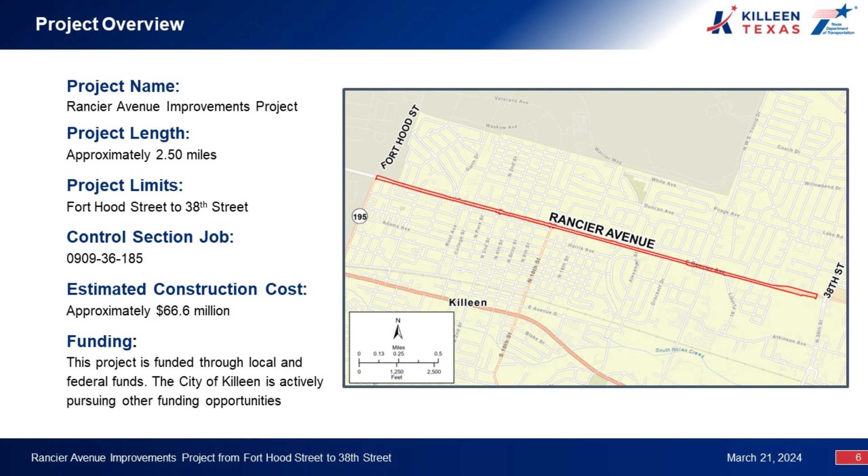The estimated cost of the proposed project is approximately $66.6 million, which would be funded with a combination of federal and local funds. The City of Killeen is actively pursuing additional funding opportunities.

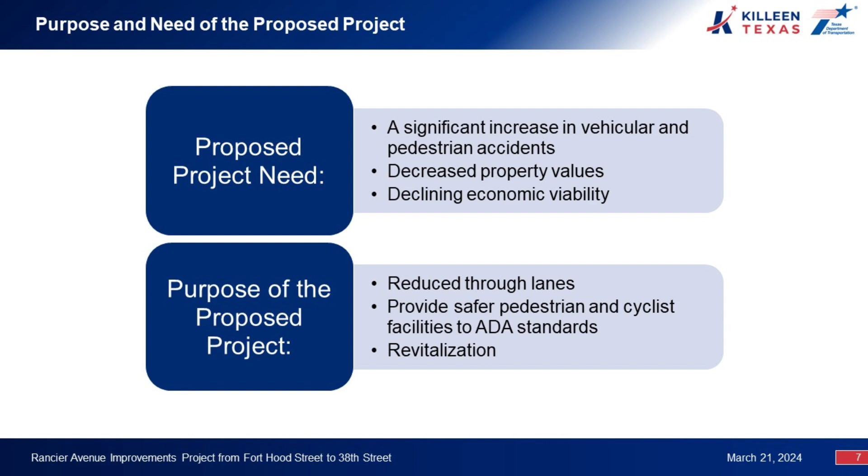The proposed Rancier Avenue Improvements Project is needed because in the past 50 years, Rancier Avenue has seen a significant increase in vehicular and pedestrian accidents, a decrease in property values along the roadway, and a decline in economic viability in the area. The overall purpose of the project is to reduce through lanes, provide safer and more accessible facilities for pedestrian and cyclists meeting ADA standards, and increase the economic value of the area.

In this part of the presentation, we will introduce the proposed improvements so that you can become familiar with what actions are being considered and provide informed feedback. Rancier Avenue can be separated into distinct zones. These zones are simply based on the context of the existing uses and are subject to changes. This slide illustrates the limits of each zone.

The post-transition zone covers the limits east of Fort Hood Street to west of Root Avenue for approximately 0.57 miles. The urban zone covers the limits east of Root Avenue to west of 14th Street for approximately 0.47 miles. The city transition zone begins east of 14th Street to west of W.S. Young Drive for approximately 0.83 miles. The Greenway zone begins east of W.S.

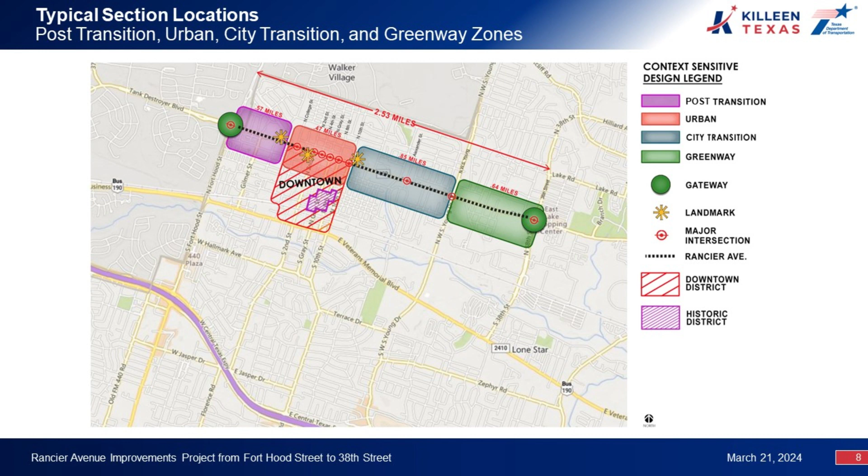Young Drive to west of 38th Street for approximately 0.64 miles. Let's take each zone one at a time. The different configurations of these zones are illustrated using typical sections, which are cross-sections of how the roadway looks today or would look with the proposed improvements.

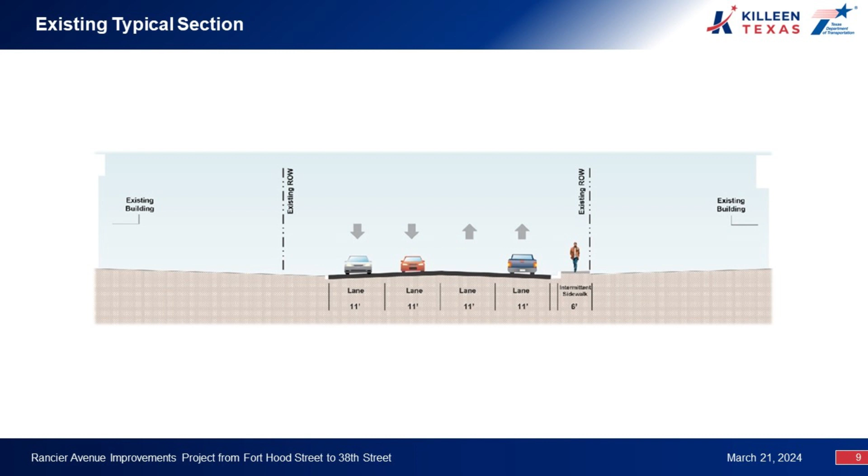Today, Rancier Avenue has four 11-foot wide lanes, two in each direction, and discontinuous sidewalks. The proposed post-transition zone shown here would have two 11-foot wide travel lanes, one in each direction, with an 11-foot wide turn lane or raised median with landscaping, two 5.5-foot wide bike lanes, one in each direction, and 8-foot wide parallel parking lanes, 6.5-foot wide landscaping buffers, and sidewalks varying in width from 8 to 10 feet wide on each

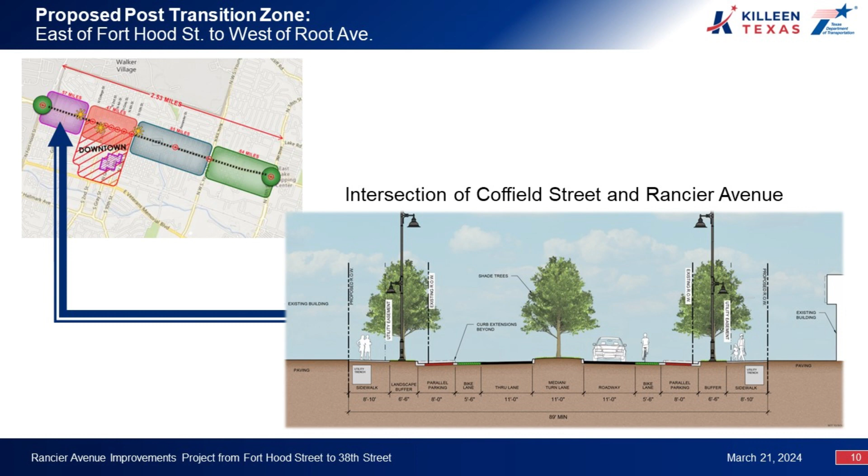side of Rancier Avenue. The proposed urban zone would have two 11-foot wide travel lanes, one in each direction, with an 11-foot wide raised median with landscaping, two 5.5-foot wide bike lanes, one in each direction, and 14.5-foot wide landscaping buffers, and sidewalks varying in width from 8 to 10 feet wide on each side of Rancier Avenue.

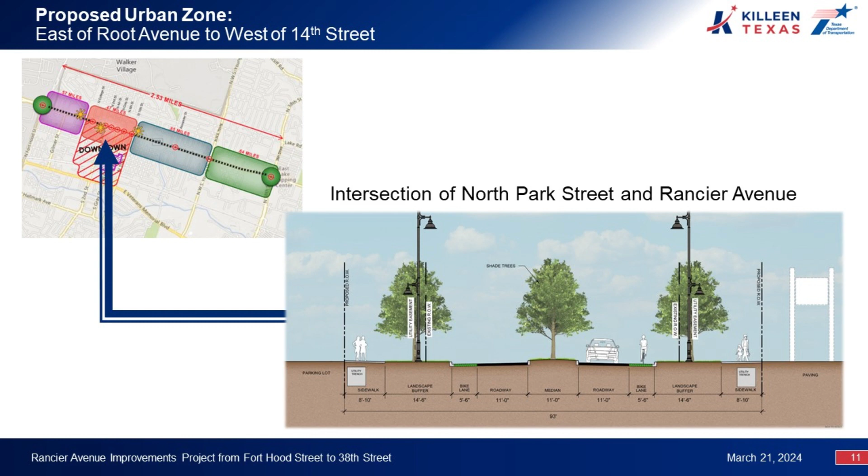The proposed city transition zone shown here would have two 11-foot wide travel lanes, one in each direction, with a 14-foot wide turn lane, two 5.5-foot wide bike lanes, one in each direction, and 6.5-foot wide landscaping buffers and sidewalks varying in width from 6 to 8 feet wide on each side of Rancier Avenue.

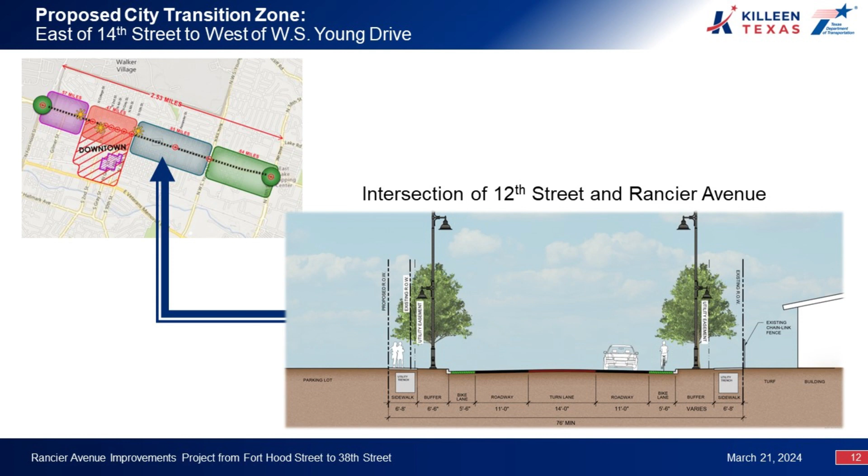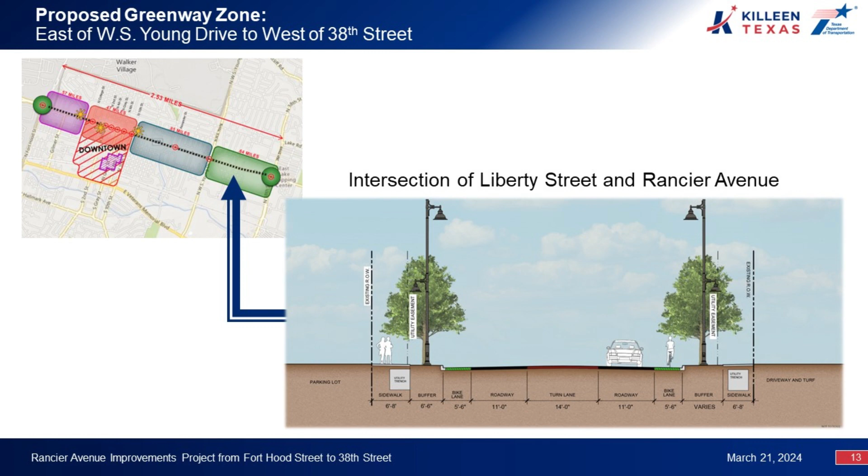The proposed Greenway zone would have two 11-foot wide travel lanes, one in each direction, with a 14-foot wide turn lane, two 5.5-foot wide bike lanes, one in each direction, and 6.5-foot wide landscaping buffers and sidewalks varying in width from 6 to 8 feet wide on each side of Rancier Avenue.

The proposed project would require the acquisition of approximately 2 to 17 feet of right-of-way along the north and south sides of Rancier Avenue, resulting in a new right-of-way width of 76 to 93 feet. As currently designed, the project would require approximately 2.7 acres of additional right-of-way and would result in 121 partial acquisitions of adjacent property but no displacements. The proposed right-of-way line can be viewed on the layouts at the open house meeting or online at the webpage listed later in the presentation.

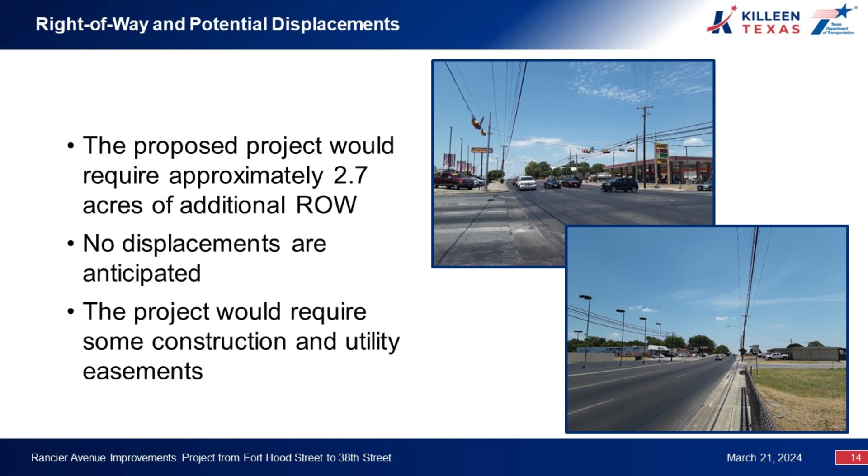This project is receiving federal funds, and because of the federal component, TxDOT is required to assess the potential environmental effects of the proposed project in accordance with federal standards. The process that is followed is called the National Environmental Policy Act process, otherwise known as NEPA. The NEPA process provides analyses of the potential impacts to the natural and man-made environment and helps the decision maker to make an informed decision on whether or not to proceed with the project.

On December 9, 2019, TxDOT received a signed Memorandum of Understanding from the Federal Highway Administration, or FHWA, that permits TxDOT to assume responsibility from the FHWA for reviewing and approving certain assigned NEPA projects. This review and approval process applies to this project.

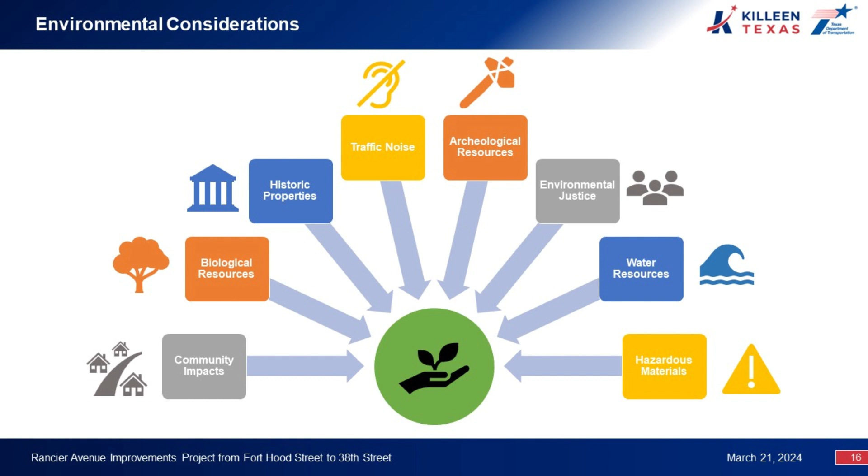The project team is identifying and evaluating potential environmental constraints that occur within the project area. Areas that are under review include community impacts, biological resources, historic properties, traffic noise, archaeological resources, environmental justice, water resources, and hazardous materials. The project would be designed to avoid or minimize impacts to the greatest amount practicable. Once completed, technical reports documenting the analysis and the conclusions of these studies will be available for review upon request.